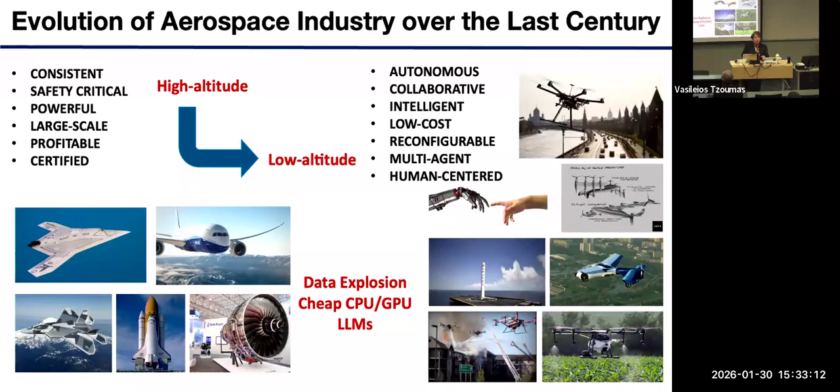From the perspective of the aerospace industry, what we see happening is a shift from the high altitude to the low altitude space. In high altitude commercial aviation, by enforcing zero tolerance to accidents, public trust has been achieved, with 4.5 billion passengers flying airplanes per year.

For low altitude space, we don't have such powerful claims. The low altitude space remains highly vulnerable to different uncertainties, with the DCA airport collision of a year ago being a classical example, when a military training flight collided with a piloted passenger jet. This means that at low altitude, we have lots of problems to solve.

A few years ago, I was at Georgia Tech for a seminar visit like this, on a cold January in 2018, when one of their professors, Evangelos Theodorou, who was a finalist for the Alpha Pilot competition created by Lockheed Martin and MIT to challenge drone racing environments, asked me if we could bring the L1 adaptive controller into this environment, because he was trying to compete.

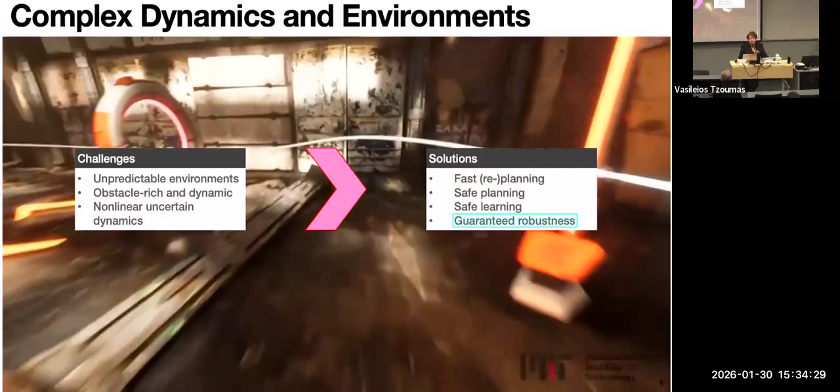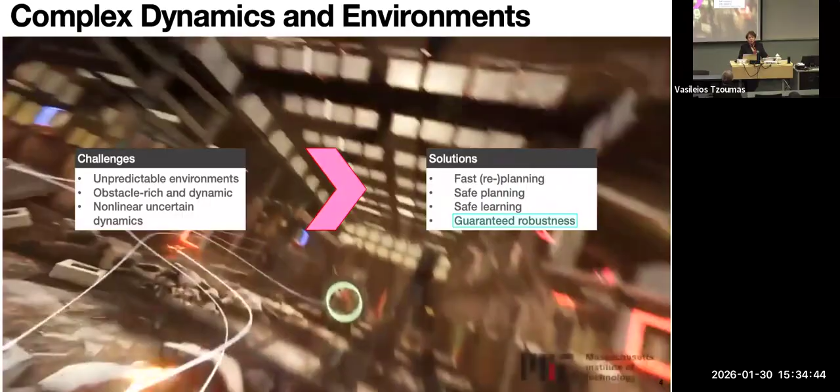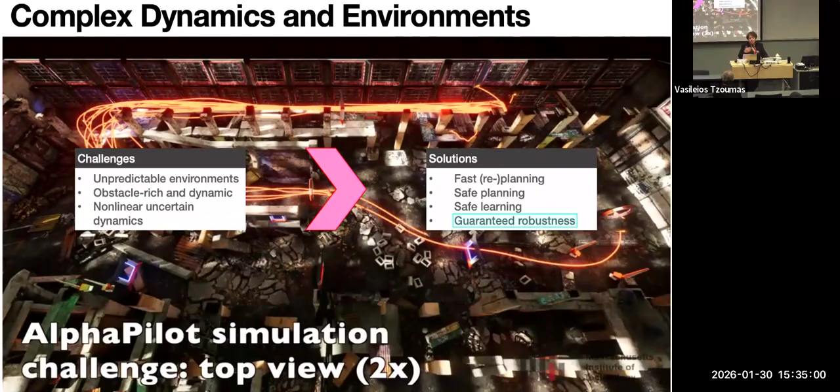So we have vision-based sensors mapping the environment every millisecond, creating and updating the new path. We need a type of control algorithm suitable to work with these environments.

So let's move forward and see what it means to have an autonomy pipeline. The autonomy pipeline has these types of sensors, mostly vision-based, mapping the environment and helping the planner generate a trajectory, which the autopilot has to follow.

So in this process, there are fundamental questions coming up. What if the autopilot cannot deliver what the planner is asking to do? And what if the planner does not account for the errors in the environmental map? The autopilot needs to have awareness of its limits and be able to communicate it to the planner to generate trajectories that it can safely fly along.

The number one question we face in this communication is the language barrier. These vision-based sensors processing visual information, like self-driving cars with autopilots in Tesla cars, face pedestrians or traffic of the daily commute that cannot be modeled deterministically. The right representation of these is stochastic models. Naturally, these vision-based sensors that map the environment give inputs that have stochastic origin.

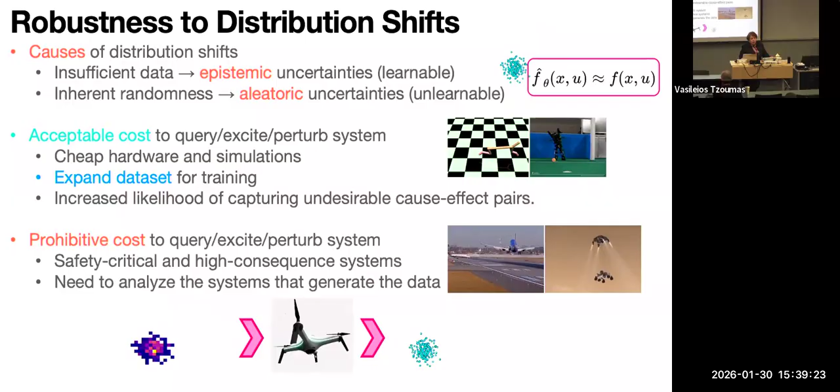This is where we need architectures that would guarantee safety and predictability in application and enable safe use of learning algorithms. These architectures that we aim to establish must be able to use distributionally defined guarantees in a rigorous way, and they must be independently verified by some Monte Carlo methods to help merge the design space with the test space.

And the reason I say this is because, for example, the way the FAA certifies flight controllers is that they get these gain and phase margins across the flight envelope through gain scheduling, concatenation of linear baseline controllers, and they test it all in a Monte Carlo environment with some uncertainty distributions. And if it all checks green, it's good to be certified.

But it would be good to have theoretical guarantees, to know how to get distributional robustness guarantees for deterministic controllers and to merge the design space with the test space. And we want safety to be decoupled from learning, because quite often you cannot afford the luxury of large data sets.

You may have poor training, or data disappearing from your imaging sensors due to occlusions or other kinds of disturbances. So you want to have safety guaranteed independent of the learning, and the learning to give you the opportunity for improving the performance intermittently.

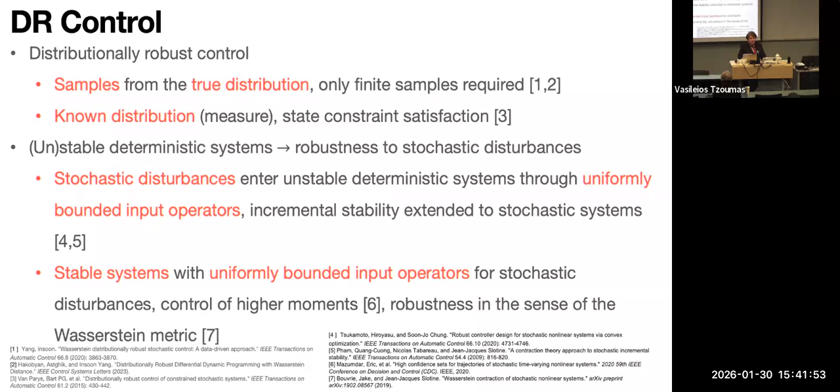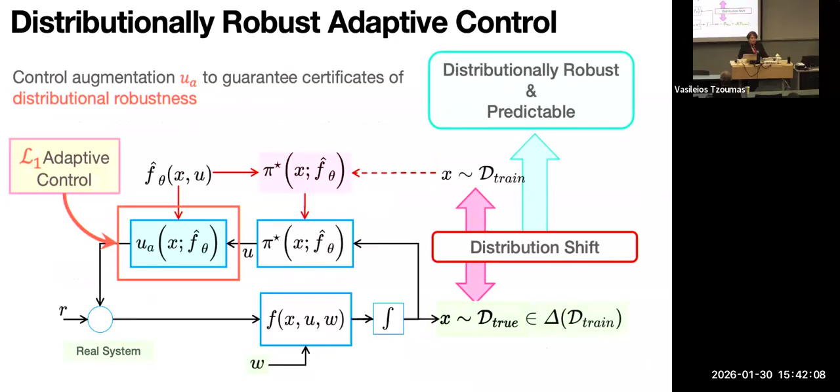That's our difference. So what we do: say you have a machine learned controller, denoted here by pi star. When you deploy it on a real system, you will face distribution shift. This is where we bring in the L1 adaptive controller to robustify and maintain it within a tube around the nominal distribution.

L1 adaptive control is not new. I have presented it here in Michigan twice already over the past 20 years. It was established by our group back in 2005-06. It's a simple filtering mechanism to decouple the estimation loop from the control loop to enable fast estimation rates without losing robustness. Its input-output performance is equivalent to internal model controllers, with the only difference being that here we do not have model inversion, while in internal model control you may have model inversion.

Through this predictor structure, which is a straight feed-forward dynamics, we are able to accommodate saturations, delays, and other types of nuisances from the system as we learn them on the go, avoiding model inversion. So it has been commercialized, it has been published, and the performance bounds can be represented through the decoupling structure.

One of the terms is inversely proportional to the rate of adaptation. The other is proportional to the filter bandwidth. This decoupling helps us tune it differently: one is based on the CPU, the estimation bound, and the other is based on control channel bandwidth. The proofs are done through Lyapunov and small gain theory, well-established tools historically.

Here is a brief history of it. As I said, we started in 2005-06. We flew it on the NASA subscale Boeing 757 in 2007-10. Then we got lots of papers with different companies. Raymarine commercialized it for evolution autopilots. Caterpillar commercialized it for hydraulic pumps. We got on the experimental rig of Statoil before the oil prices crashed, for drilling pressure regulation applications. We worked with Eurocopter, Seagate, and lots of other companies.

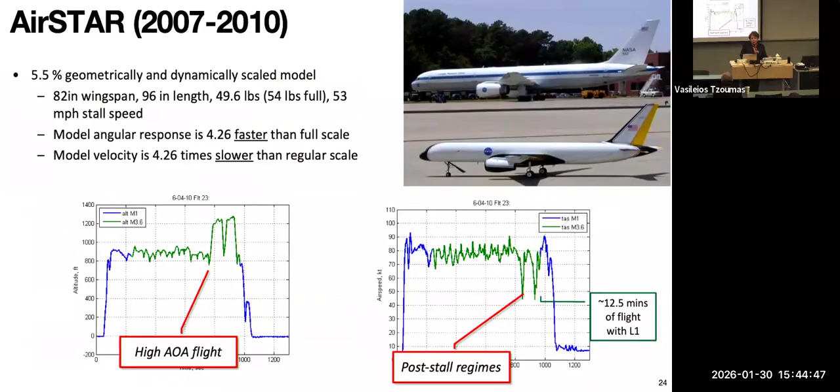So I want to do a brief recap of this Boeing 757 flight test from NASA. This is a 5.5% model that NASA built over five years. 24 groups were funded to fly the controller. Everyone was given one flight condition: 4-degree angle of attack, 80 knot airspeed flight condition, and we had to test controllers for robustness.

This is the stall indicator here. You will see they will push to stall, it will turn red, and they will repeat it. Try ramping up to 15, okay? Moment around 18, okay? Well, back to normal flight. You ready? Yeah, okay. All right, turn down. Okay. Fuel state is 4.7.

Let's repeat that. Climb, maintain 1,200. And they repeat it to check the transients, because our big claim was the transient performance guarantees. Repeat that. Slow down a little bit.

Go. Okay, let's stop research. Recover, they ran out of gas. This is the red indicator.

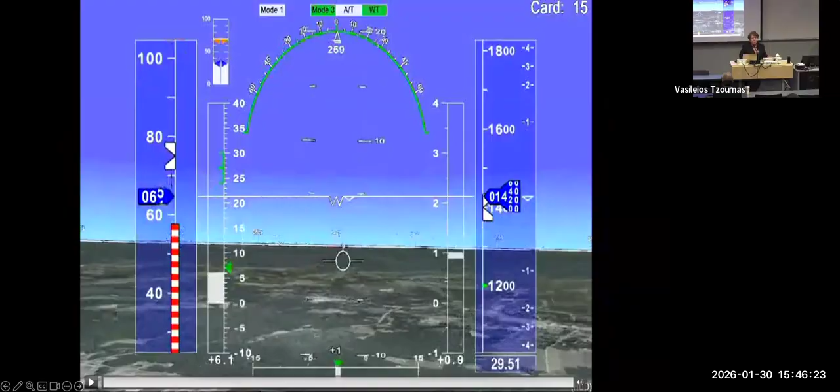The reason they repeat is because they wanted to test for the transients, which was our biggest claim. Out of 24 groups, 9 groups were invited for flight testing. The rest were disqualified at the simulation level. They eventually used the controller to go to the edge of the flight envelope, to 28 degrees, to do Schroeder sweeps to collect more data for updating the aerodynamic models. This is what you see. The plane was stalling at 12-15, as you saw. Now they went to 28 and are doing the Schroeder sweeps for updating the aerodynamic models.

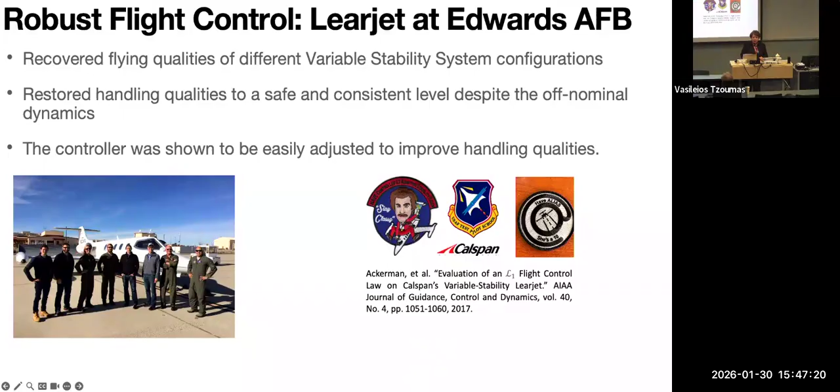With that, we reached 2015, when one of my former students called me from test pilot school at Edwards Air Force Base, suggesting I test it on a Learjet model called Calspan, which is a variable stability system, so it can shut down if something goes unsafe. Here, they didn't have the opportunity to go into stall; the vehicle wasn't suitable for that. But they could do, for example, landing, which NASA couldn't do on the 5.5% model since they had a safety pilot for landing there. But here they could go into landing. Let's look at their flight test.

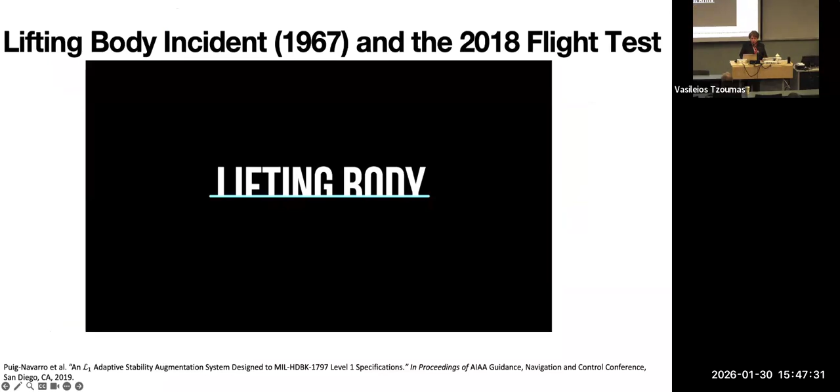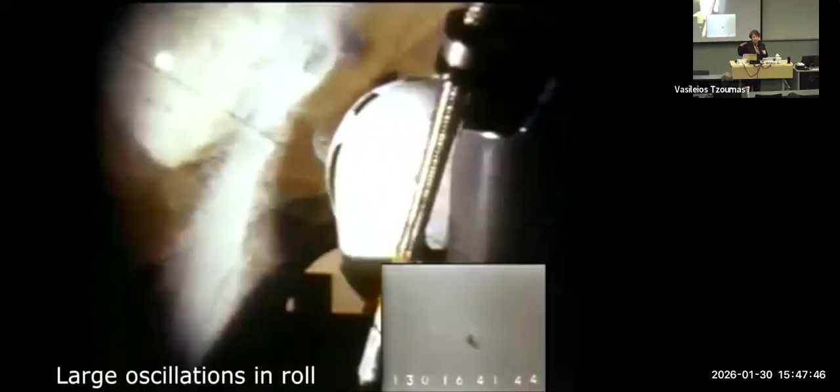There was some media here, Aviation Week, who liked to write about the test pilot school flight test. This was the F-16, which we cannot show. But this is the flight test where they had accident data from 1967. They could load this onto the test aircraft, the Learjet, to make it behave like this accident, where the aircraft is released and gets into roll oscillations and eventually crashes. The pilot luckily survived in this case. This data could be loaded on the test aircraft to test pilot performance. The pilots get licensed by flying this airplane. The first episode is very short because it behaves very unstable and shuts down, but you'll see my student sitting on the left.

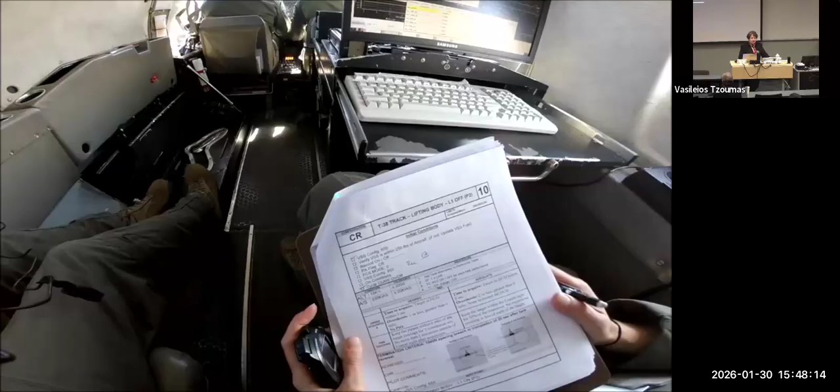Students love to go and test their controllers. Can you get the airplane? You get the airplane?

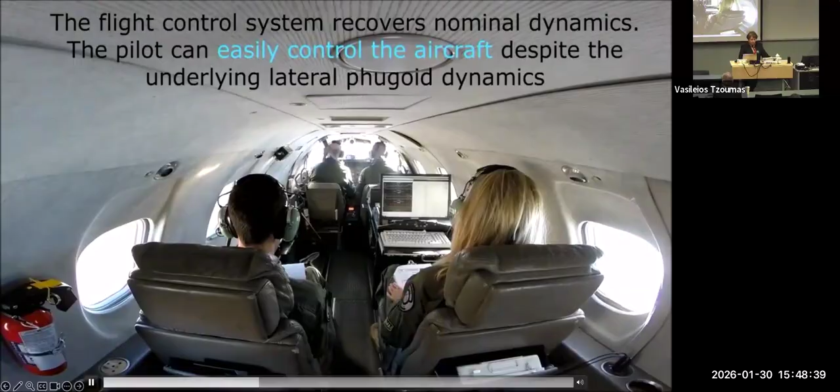You heard the pilot saying there is still something there. I will explain it with stochastic analysis. The deterministic analysis never gave the answer for this something. That's a small buzz, and now you will hear them.

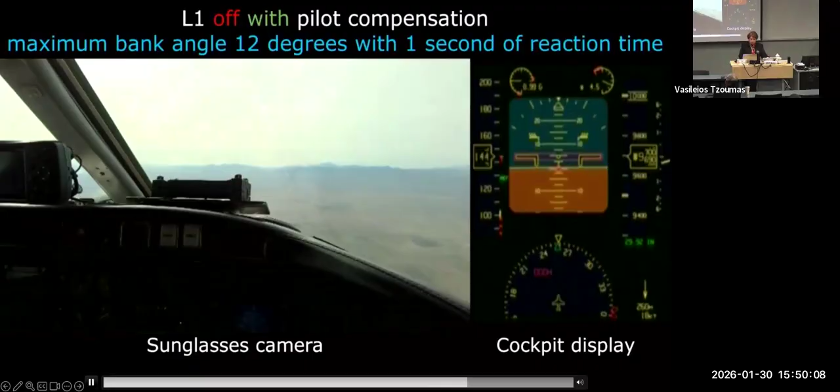On, in ready, tackle. Running. Engine on. Okay, power's coming back. My hands are free, 3, 2, 1. Now. Controls fixed, and recover please. Okay, and recovering. Power's back. And now the pilot corrects it up to 12 degrees. You see the bank, I'm ready to try this now with the pilot correcting for it. Okay, I'll give it about 1 second reaction time. I'm on conditions, all right, and then recording on my call. Ready, tack, on. Okay, power will be left throttle. Okay, in 3, 2, 1. Now, one potato and recovery. And recording off, matching throttles.

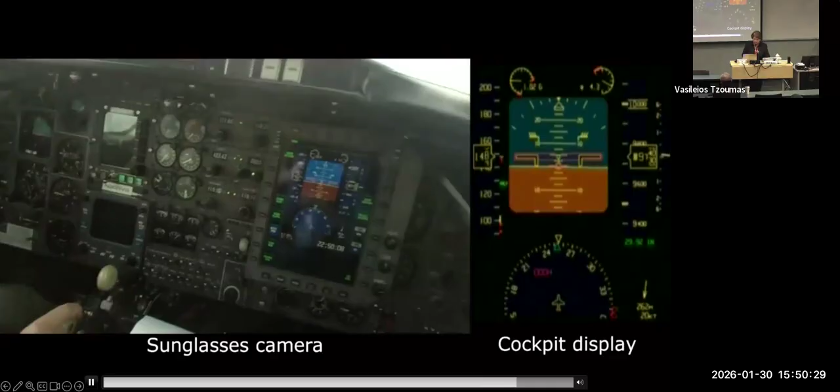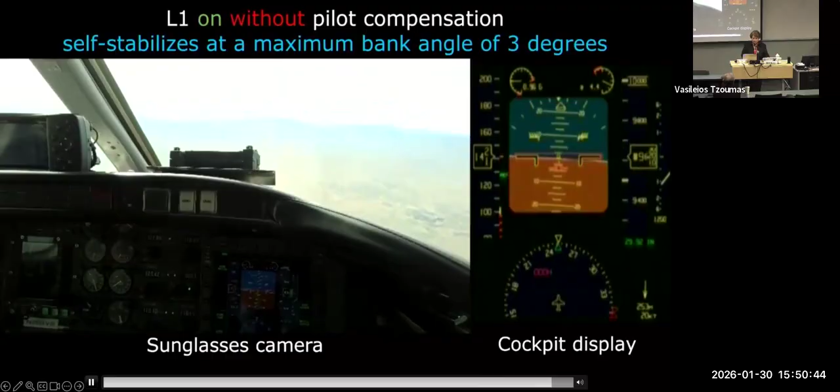So the pilot was able to get to 12, from 20 to 12. Now with L1, they get to 3. And I'm ready for the recording on. Ready, on. Okay, left throttle coming back in 3, 2, 1. Now, I'm not touching the controls. Nice demonstration, check that out. About 3 degrees of left bank. Feeding in the rudder to match. I can feel that. It's descending a bit, but that would be easy to compensate for. Okay, I think you got some good data there. All right, recording up, matching power, recording's coming off. So 3 degrees, something left, right? So the deterministic analysis does not give these answers.

But when we went to stochastic, we found the answer. Right here also the Aerospace and Defense Technology wrote about us - I wasn't aware of it. In the other case, Aviation Week came to test pilot school interviewing us, but this one I got from the college. Interestingly, we were on the front page.

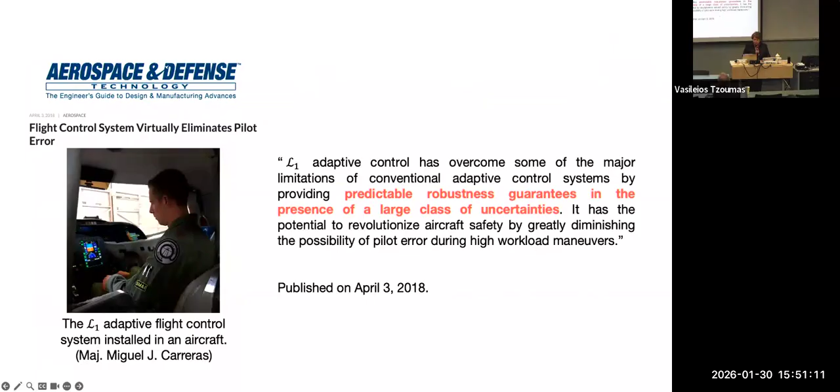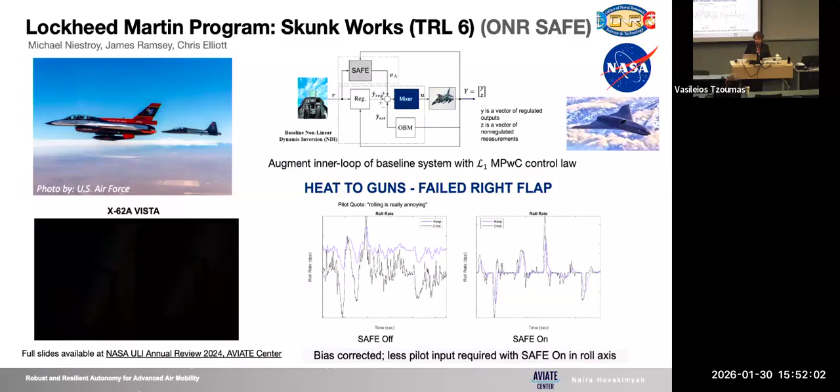So it now goes through future transition, technology transition opportunities at Lockheed Martin. We look forward to more opportunities to work with them. They claim TRL 6, and with the future platform they're hoping to get TRL 8, 9. It has to do with the size of the platform, this TRL grows. Some other applications along the way.

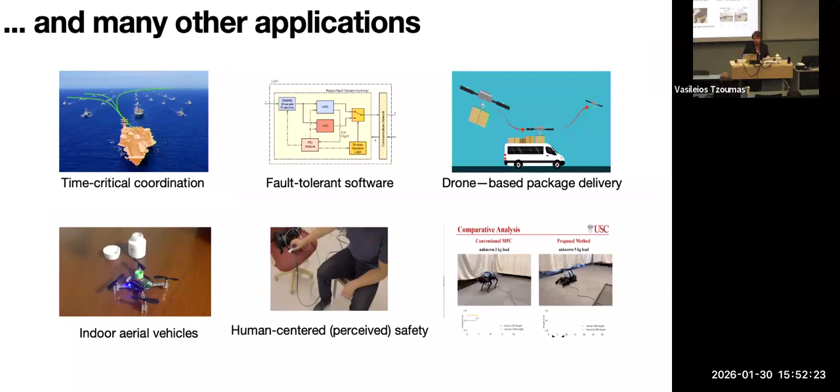I like to show this one because this was something that got us into the New York Times, that's why it's worth sharing. It's an elderly care project.

This is the inspiration. This helps tell why control is important to people outside control. You show these cartoons, everyone understands this is a control challenge. Now they can't lift it, they call friends.

And they call friends, and communication, cooperation, collaboration, and then human safety perception. So this vision motivated us to work with a psychology professor who was using VR to test humans' perception of safety, which is different from engineering safety. Engineering safety is about lack of collision. Human safety perception is a lot different - why can't I move? Oh, okay.

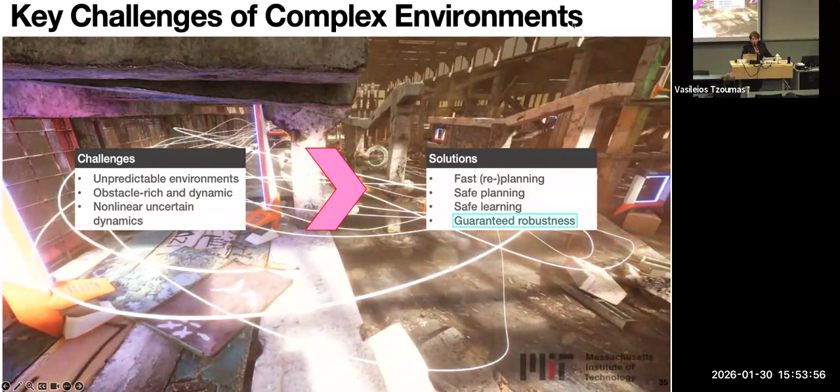So we come now to this environment. And in this environment, like we said, you have to bring drones to find humans, to save humans, and we have to be able to work with autonomy. This was brought to me in 2018 at Georgia Tech, and it immediately opened up this.

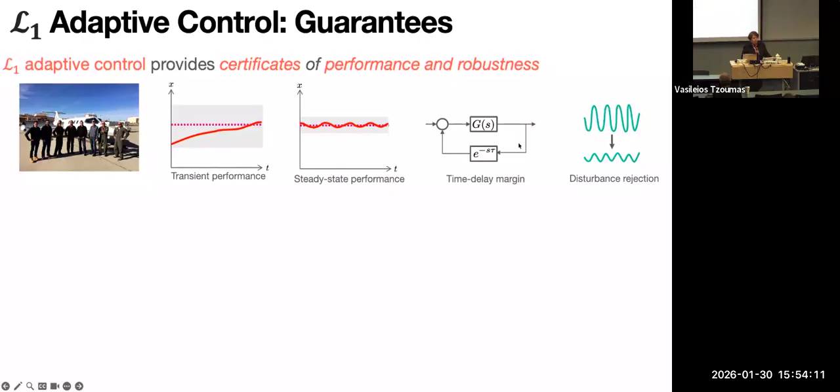So if we designed L1 with this historical understanding of robustness, transient, steady state - what we teach in junior level control class - and we address these issues rigorously, and we flew the Learjet. As the world around us changes, new forms of guarantees are needed.

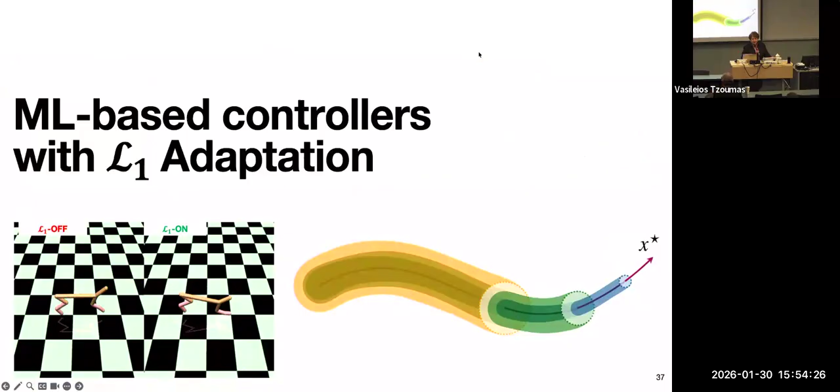So now our sensors are data-driven. We have to talk of distributional guarantees and all these things. So the Georgia Tech colleague was one of the finalists, and he was implementing the model predictive path integral controller on the drones. This is 2020 IROS.

This was the year COVID hit. I have to give lots of credit to the Georgia Tech students who were going to lab with masks, as interns. There was no more than one person allowed to go do experiments to integrate the L1 adaptive controller with the model predictive path integral controller.

So the model predictive path integral controller is an MPC solution with learning. It computes optimal control solutions forward in time, updates the control sequence iteratively by sampling thousands of trajectories. This is what we don't like. L1 robustifies their solutions against discrepancies. It can leverage parallel sampling for modern GPUs, and handle complex dynamics and cost functions.

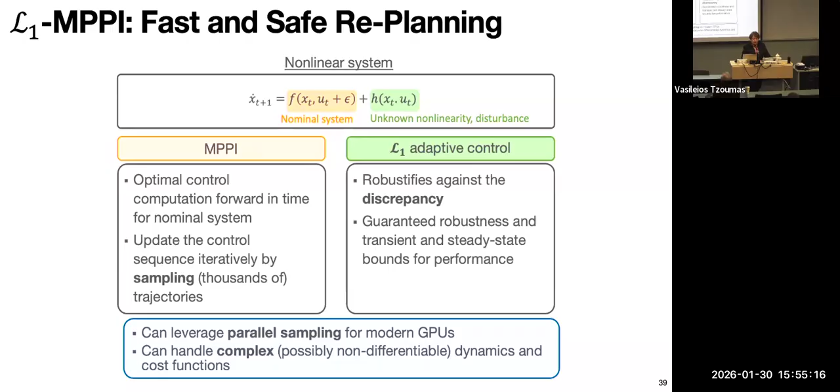So they got this IROS paper. This was empirical demonstration that we could bring L1 and integrate it with MPPI to clear some of the gates where they were crashing. They were not the winners.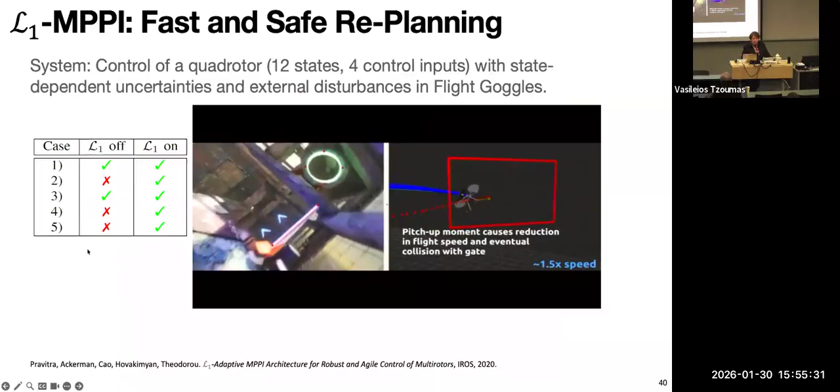The winner was Scaramuzza's team, but they were one of the finalists, and they had data, they had experience, and we could test it already after their competition was over. And as you see, we went and cleared all these gates, showing empirical evidence and getting out an IROS paper.

After IROS, we did this MBRL paper. We did some empirical trials. So we augmented a model-based reinforcement learning controller with L1. The challenge is that reinforcement learning algorithms learn models that are highly nonlinear, and the parameters of these models never match the true parameters of the system because they take some neural networks and train.

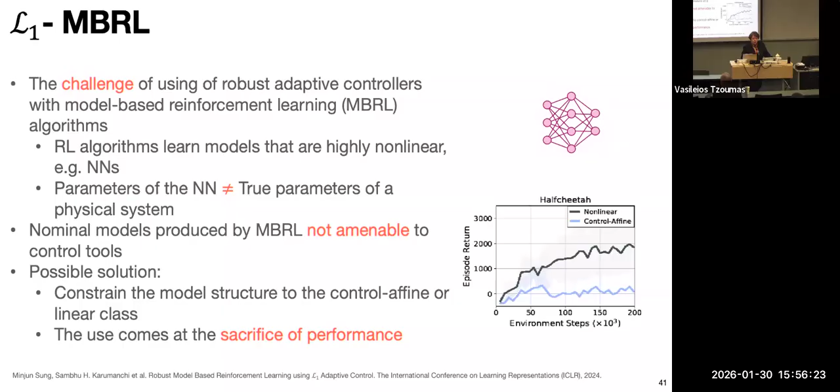So they are not really ready for classical control type of augmentation. If you want to do it, you have to linearize the model structure, but it comes at the price of sacrificing performance. So we wanted to do an add-on L1 to improve MBRL performance - don't touch the legacy architecture, don't touch the assumptions, take that high-level MBRL like a black box and see how you can augment it with L1.

It was lots of effort - 2 years we were submitting it to some machine learning conferences. Eventually we got it into ICLR in 2024. And we tried it on 5 different models of the Mujoco environment: inverted pendulum, swimmer, hopper, walker, and half cheetah. And we got improvement almost in all the cases except for one.

Because now we have probabilistic guarantees, maybe we didn't tune enough, because we wanted a single L1 controller to work across all the environments, all the systems, without any redesign or retuning - which is our main claim with the L1 adaptive controller, that it's easy to design and it doesn't need retuning or redesign.

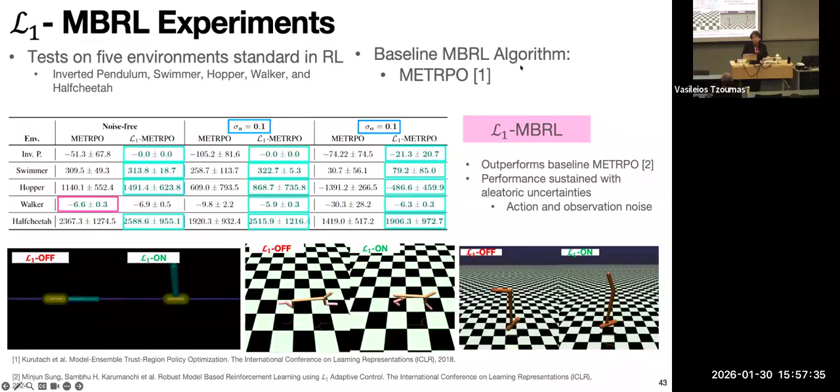So in one case we didn't see the improvement, but now we're augmenting an MBRL controller. Things are stochastic, guarantees are probabilistic. So this motivated us to look into this distributionally robust adaptive controller more rigorously.

In a recent SciTech conference, we showed augmentation of imitation learning. Where do you need imitation learning? So you have a pilot who learns to fly on a simulator, then goes to fly the real system. Here you have uncertainties between the real system and the simulator, which the L1 adaptive controller can compensate for.

But if you want to take out the pilot and put an AI agent, then maybe using L1 and justifying it is not honest enough. So you want to have some imitation learning that can imitate the pilot. You can collect pilot data and imitate the pilot.

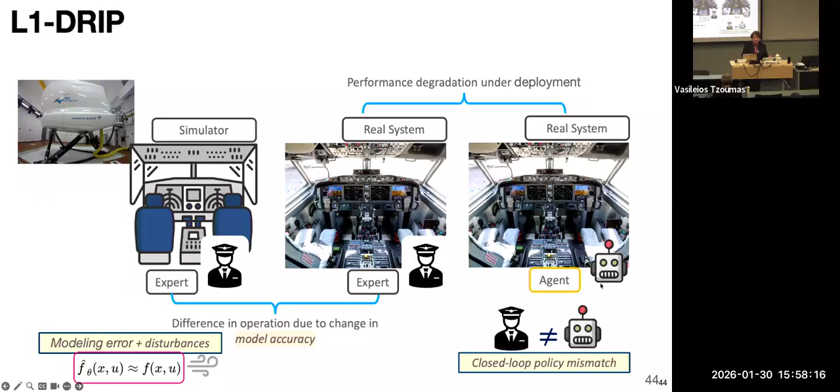So it's the right use of maybe imitation learning policy in this context. But then you want to combine these different robustness characteristics coming from L1 for modeling uncertainty, and from imitation learning for policy changes, because imitation learning at that point assumes there is no change in the dynamics. It just replaces the pilot, assuming the dynamics doesn't change, but in reality it changes. So with a layered architecture, you can compensate for both.

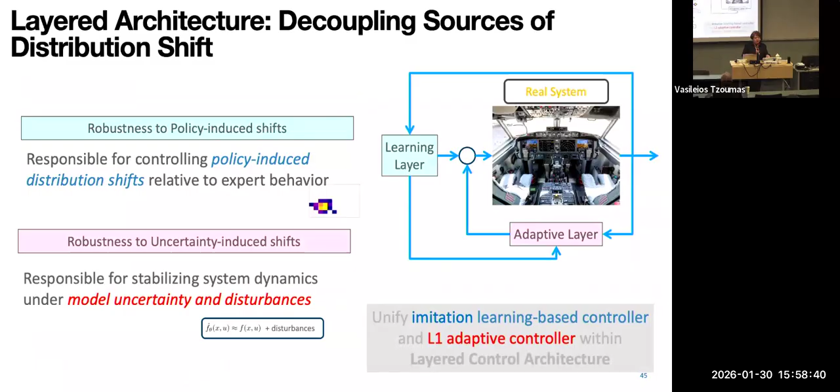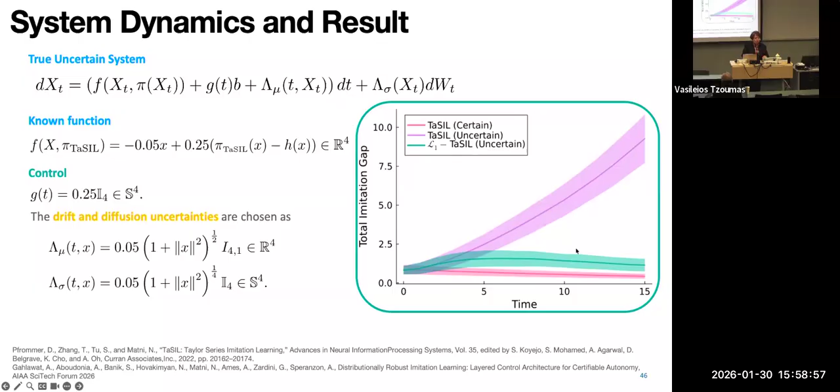This decomposition is critically important. And here we show some simulation. This is a toy problem. The NASA model is still being worked out with its full simulator environment. But with the toy problem, we just showed how bringing L1 on top of imitation learning can compensate for some of the uncertainties that the imitation learning could not.

Now let's do a little bit of math. We're half hour through the time, so this will be minimal. So let's put some rigor into all this, right? We're talking so much about certification.

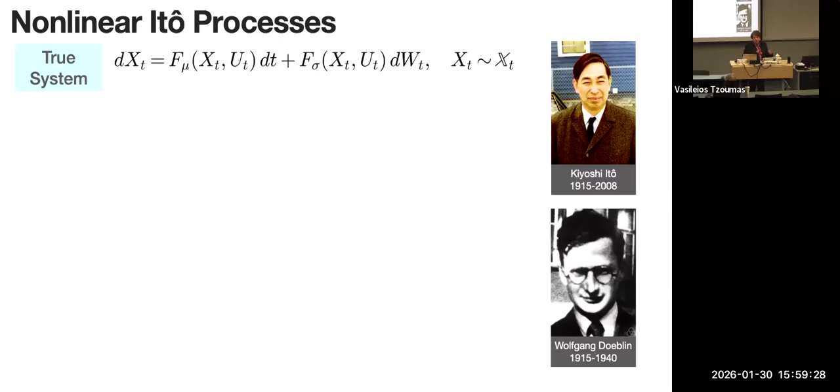So what do we say? We have a deterministic controller designed for Euler-Lagrange equations, which are deterministic. But I go and implement it on the real-world system. The real-world system appears to be highly uncertain, highly stochastic. So we look into nonlinear Ito processes with uncertain drift and diffusion terms.

And we understand that these uncertain drift and diffusion terms can both be decomposed into known and unknown components. And we also have aleatoric uncertainty, the Brownian motion that's multiplying the diffusion term.

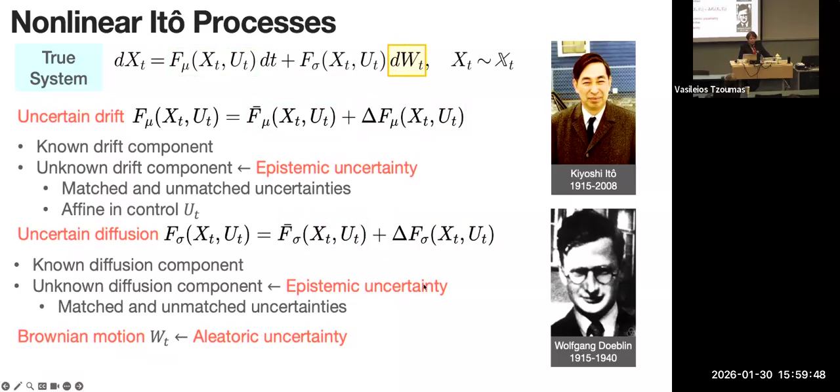With this, I have to set up a known system, right? Because anytime we want to do analysis of a nonlinear unknown system, we need to have some nominal model that we like. We have to set it up in a way against which we do the analysis.

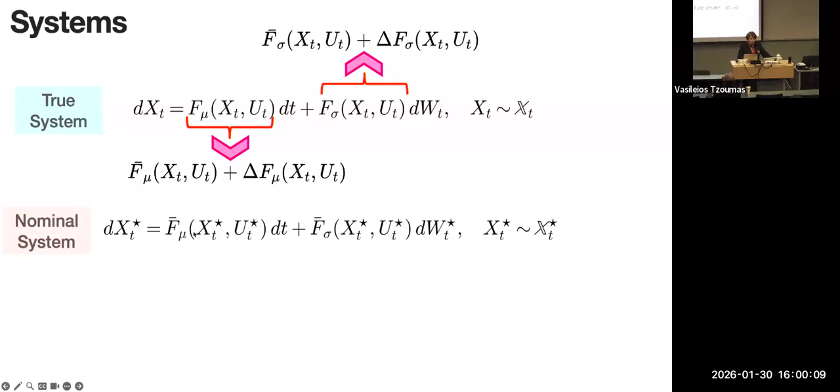So the nominal model takes the known components of drift and diffusion, but it needs to have its own Brownian motion. The key challenge here is to assume that this Brownian motion of the nominal system and the Brownian motion of the true system, the aleatoric uncertainty component, are completely independent. It's very easy to make them dependent and go through proofs in a second.

The challenge is to deal with this assumption when these Brownian motions are uncertain. But this is the honest way of approaching the problem. It took us four years to get over some of these assumptions to make the theory go through.

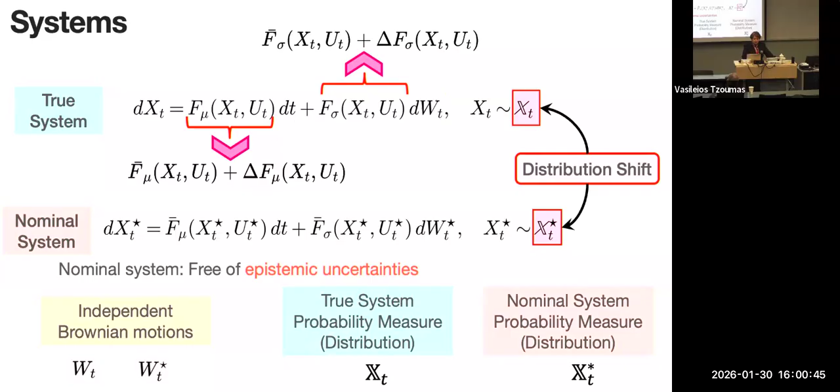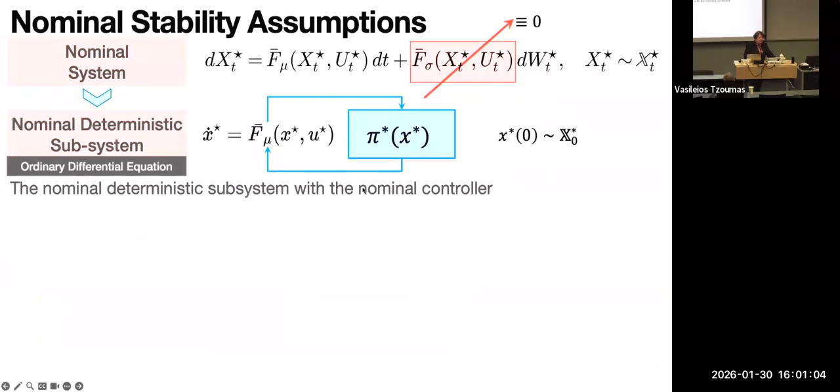So we want to tackle the distribution shift. If I look into the nominal system, I need also some assumptions about the underlying deterministic dynamics. So I get rid of this diffusion term by setting up this Brownian motion and getting rid of it, to be left with a nonlinear deterministic subsystem for which I can design, say, some type of control policy, pi star.

I need some type of assumptions here, and these are standard assumptions: incremental exponential stability of the origin. The analysis of it can be done through incremental Lyapunov functions, matrix measures, Finsler-Lyapunov functions, and Riemannian metric conditions.

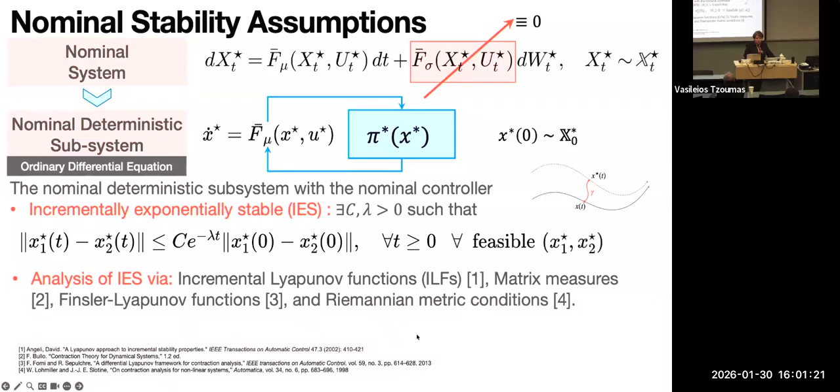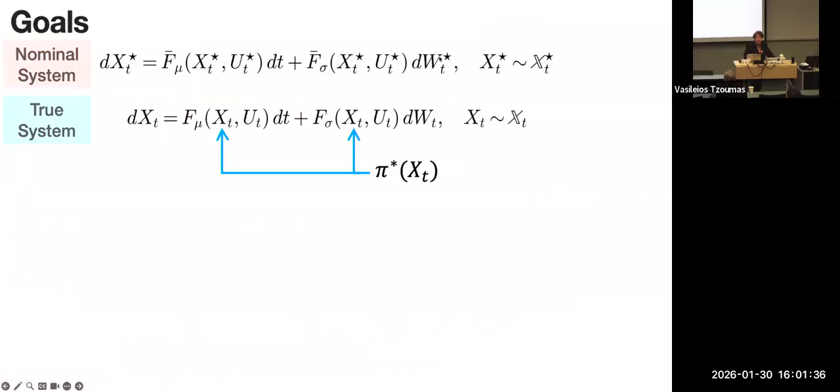Nothing new here. And now moving forward, I have the nominal system with some policy, which was this, but now I look into the nominal system that I need for the analysis. This was the deterministic part. Now I have the true honest nominal system, and I have the true system.

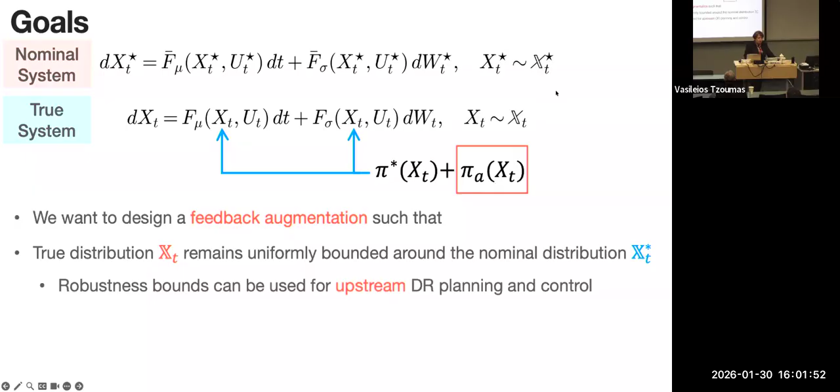When I put pi star into the true system, I augment it with some adaptive increment, with the objective to keep the true distribution bounded around the nominal distribution. The bound we compute in the Wasserstein metric, which we borrow from optimal transport theory. It preserves the distance and shape. It's a metric on the space of distributions.

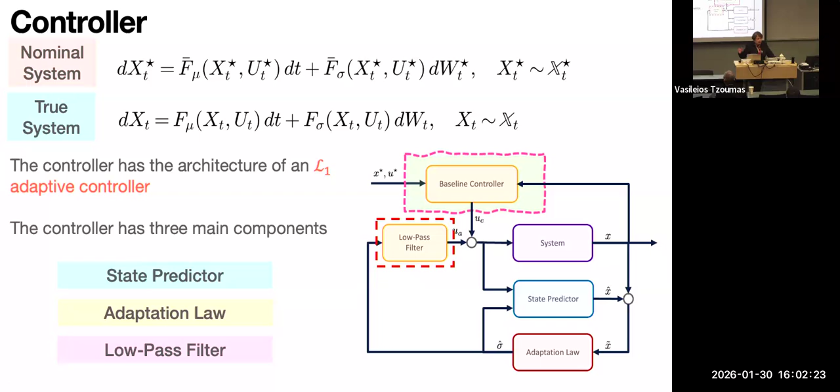To achieve that, we are applying the L1 adaptive controller for augmentation, which is born in the deterministic world. But now as I apply it, I have to acknowledge that it gets the state measured by a sensor, which will be stochastic in nature. So it brings colored noise into the system. I'm bringing this deterministic controller that gets state measurement from a stochastic sensor. So how do we deal with this? It results in colored noise injection through aleatoric uncertainty, Brownian motion that gets in.

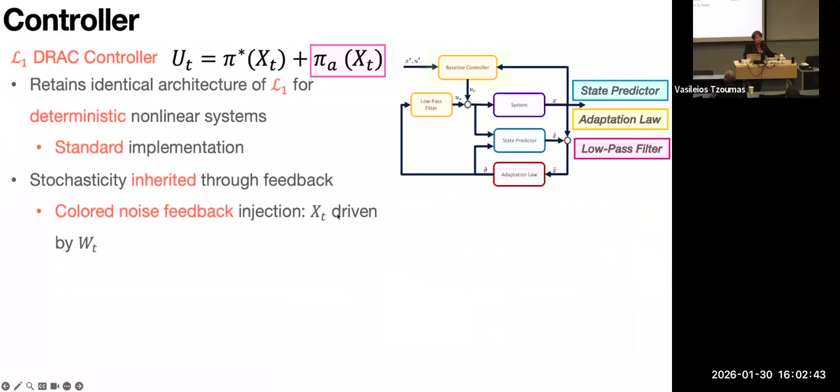Our implementation remains in the feedback space. Our guarantees are given in the space of distributions. No need to assume an unreasonable distribution of feedback. I'll skip all the math now to make the Friday afternoon easy.

So we get guarantees in terms of the Wasserstein metric on the distributions, and we get pathwise guarantees. These are upper bounded by terms which remain uniformly bounded away from zero. Remember, the pilot was saying there is something left there, and during the engine shutdown they had 3 degrees left, because now we get bounds that remain bounded away from zero. One reason is this independence of the Brownian motions that I emphasized. If I give up on this assumption, in the absence of uncertainties, I can make these bounds go to zero asymptotically. But because of the independence of the Brownian motion and the presence of unmatched uncertainties, these bounds remain bounded away from zero.

The Wasserstein metric will collapse to the Euclidean 2-norm and recover the original performance bounds of the L1 adaptive controller that we had for nonlinear deterministic systems, if I take out all the stochasticities and go back to deterministic.

So when I look into my pathwise bounds, there are nice terms to observe. We get this polylog bound, which otherwise in the distributionally robust control literature, they don't have the log term. In general the bound comes across like this. Yongxin Chen has this polylog bound from Georgia Tech, but he's not looking into uncertain stochastic systems, only known ones, so we borrow a lot of his analysis to get this polylog bound.

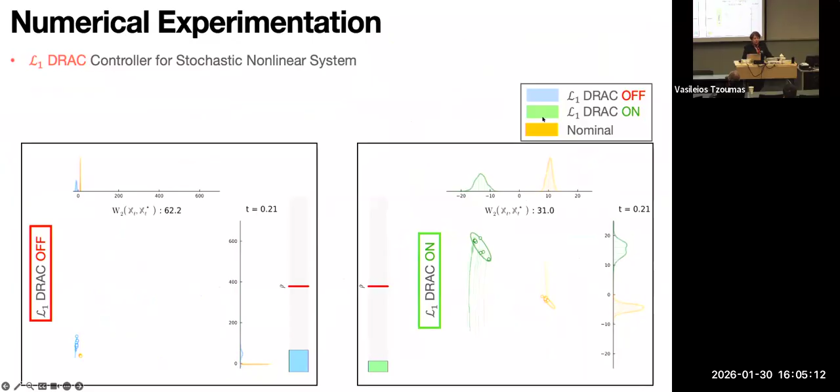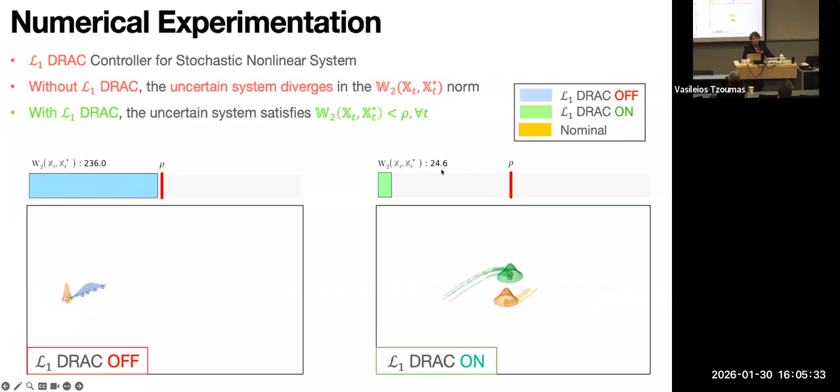Getting back to this autonomy pipeline where we started, revisiting the questions: what should the components communicate, and what should be the language for the communication? So we use these distributional Wasserstein bounds for setting up the optimal stochastic optimization for the planner. The language is the space of distributions, bounded in the space of distributions.

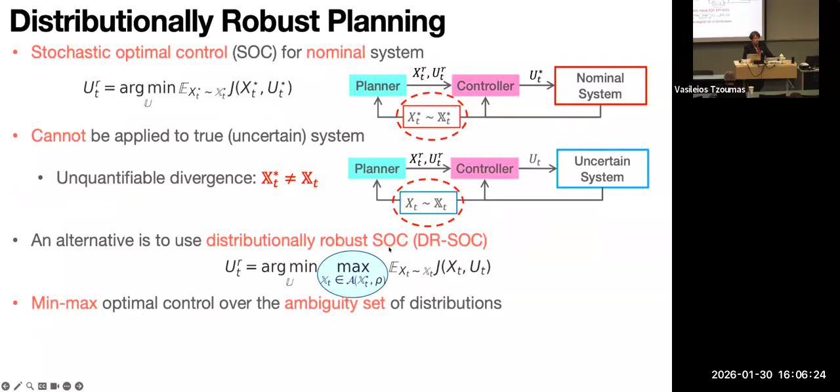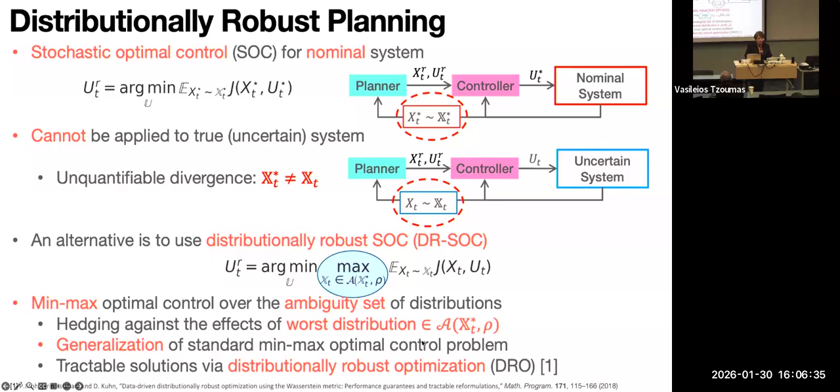The first planner we did is this covariance steering, which I presented at CDC. The stochastic optimization typically used for producing a motion planner is formulated like this, which cannot be applied to an uncertain system. To apply it to an uncertain system, there's this distributionally robust stochastic planner that maximizes against an ambiguity set of distributions, which hedges against the effects of worst distributions. So what we do is take this bound from L1 and pass it to the stochastic planner. The planner requires this ambiguity set, and that set comes from the L1 adaptive controller to maximize it.

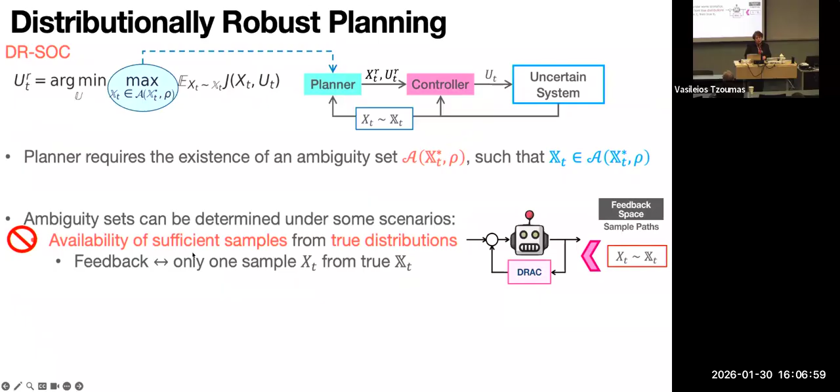So what are the key assumptions here that we were able to relax? Ambiguity sets can be determined under some scenarios. In the literature, people assume availability of sufficient samples from true distributions, which is in some sense idealistic. It may be true, but it's non-verifiable.

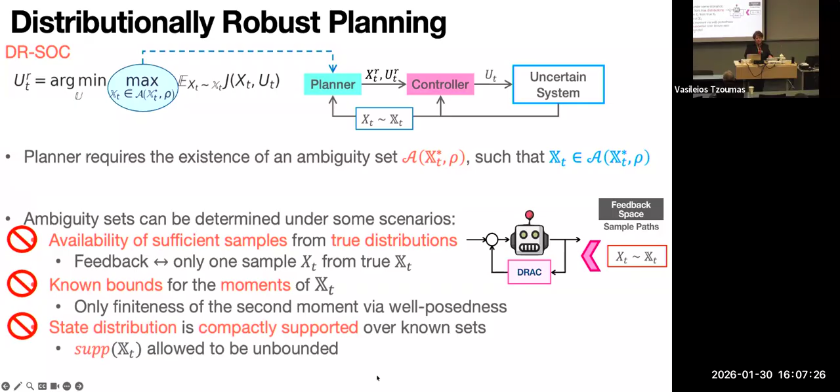So we use only feedback, one single sample at the point of measurement, as I said, it's a deterministic controller. The literature assumes known bounds for the moments of x_t. We only assume finiteness of the second moment by well-posedness, and we do not need to assume that the state distribution is compactly supported. It can be unbounded. So there are some fundamental assumptions that we have relaxed.

And with that, we solve this distributionally robust stochastic optimal planner problem. We get guaranteed margins on state distributions that enable high probability constraint satisfaction.

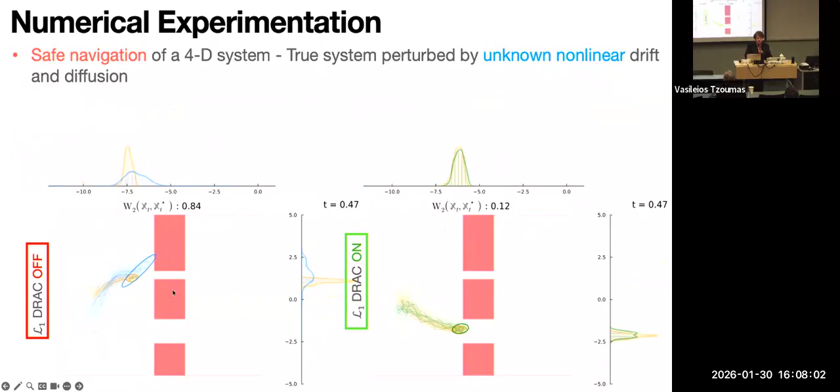By applying this L1 approach, here are the plots we will show. We have safe navigation of a four-dimensional system perturbed by unknown nonlinear drift and diffusion. Without L1, when it goes through this narrow passage, it collides with the obstacles in the presence of uncertainties, which you see in blue. Here it goes through this wide opening. When it goes through the wide opening, it's because L1 helps find this bound.

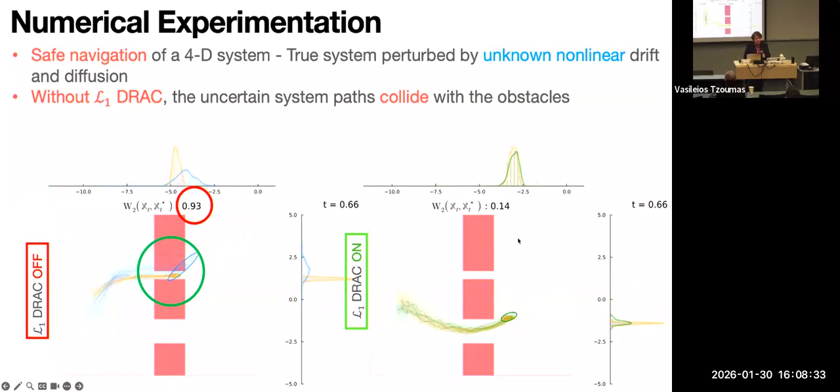And this is still pretty conservative. If we add on top of it some machine learning, maybe it can go also through here safely. But so far, no machine learning has been added. All we have done is matured L1 to be machine learning ready. We showed, on imitation learning, how to augment an imitation learning policy with it. But from the planner perspective, we're just getting there to be machine learning ready.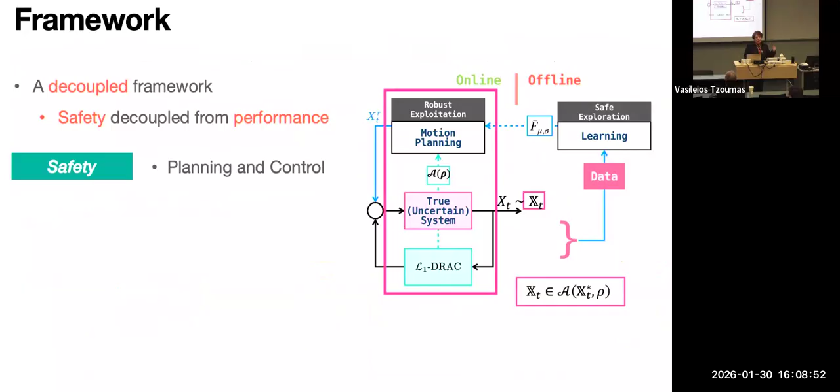Now for some future work, where does it go? It's a decoupled framework, as I said. We want safety to be guaranteed through the architecture, learning to be done offline, and update the bounds whenever the threshold which we specify is available. So safety is guaranteed persistently, performance is improving intermittently. That's how we view it.

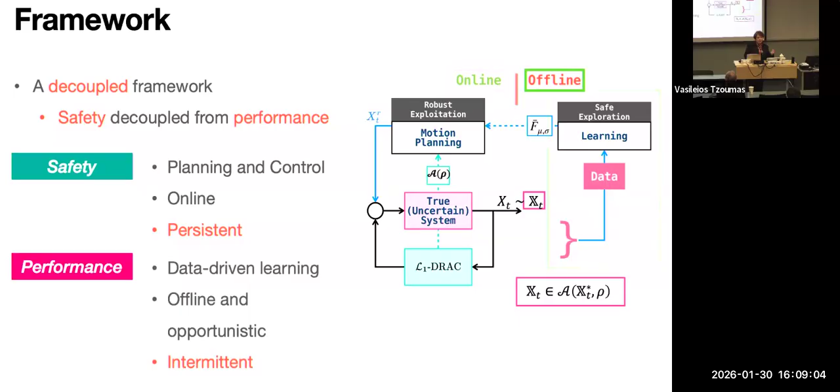Autonomous systems can be designed in different ways, as we know, but this is the way we go. The reason we go this way is because when we take out all the uncertainty, we are back to the deterministic bounds, gain and phase margins. If the nonlinearity goes away, it talks the current Bible of FAA in terms of certification.

Now we have enabled these two frameworks to talk the same language. We had a model risk certificate from machine learning, and we now have certificates of robustness over the set of probability measures for planning and control, and they can talk the same language. So we can pass the bounds to each other and enable certification of autonomous systems by raising abstractions of robustness to a higher level.

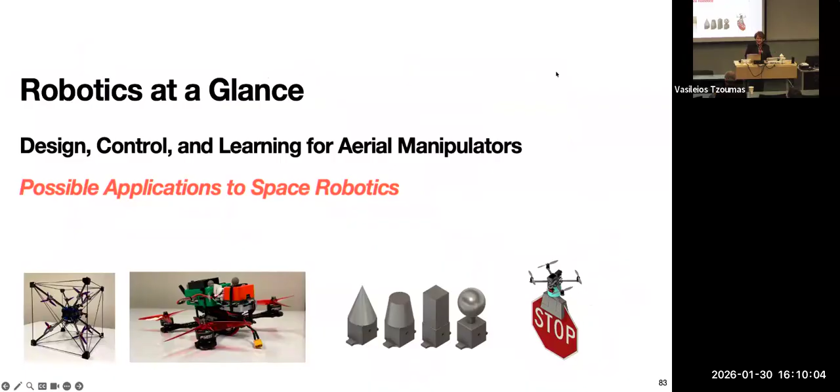With that, since we still have 20 minutes more time, I want to show some robotics applications without going through theory. Today, no matter what you do, if you don't do robotics, you can't be cool. Everything else doesn't matter. So here's an experiment that we're waiting for ICRA submission before it can go on YouTube.

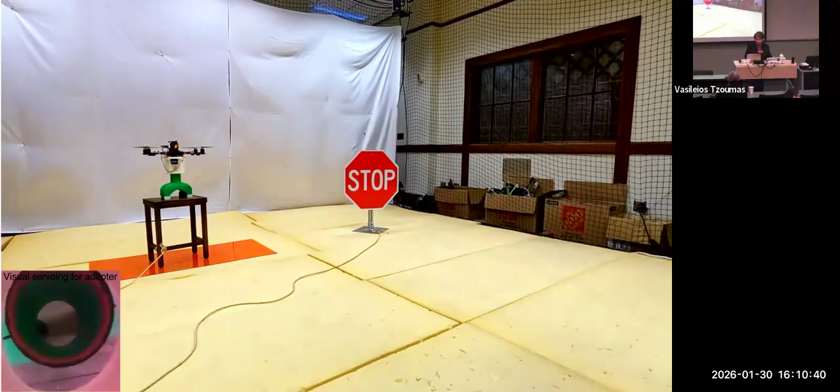It locks now to grab it, to go to the other side.

The same white gripper, it has some softness to it, has done other experiments. So let's run this experiment. It grabs different objects and drops them into these bins. Only here, out of these 20 steel marbles, one will fall out.

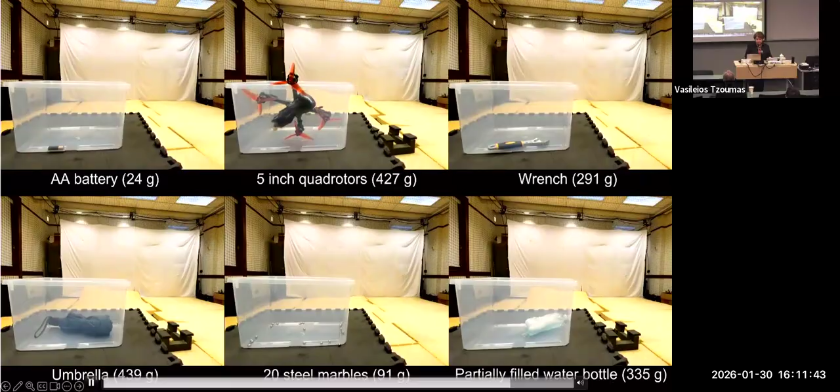Then this is a perching experiment. As you see, there are different perching poles - one is a sphere, one is a rectangle, one is round, one is a little bit trapezoidal. So it perches on all of them.

So quadrotors are not robust to rotor failures, as you know. Here we have a rotor failure experiment. When one rotor fails, it's a multiple model L1 adaptive control. So we have a few different models, and it picks the best one. There is a fast system identification method.

This paper is published in RAL. It can be downloaded, and this movie is available also. So for rotor failure, it's a quadrotor, so it picks up quickly the right controller and implements it. And you see the fan blowing the disturbance, so that's why.

And here is a propeller which is glued, and it will be unglued at an unknown time. We're just showing that. So it's unglued - now it's slow speed. Now it will go to double speed to compensate.

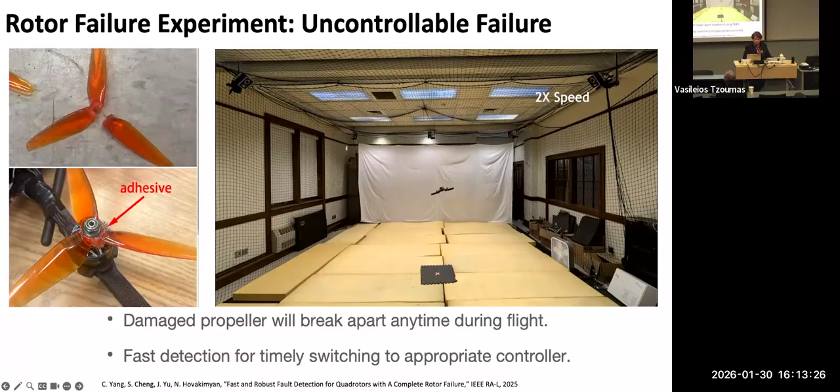So these are further applications of L1. This is a soft propeller, which we did in collaboration with Japanese researchers. It's a collision-compliant propeller that didn't fail from hitting.

This is our Omnidrone platform, which we did in collaboration with ETH Zurich. As you see with L1, we are able to stabilize around the red point. Now you will see.

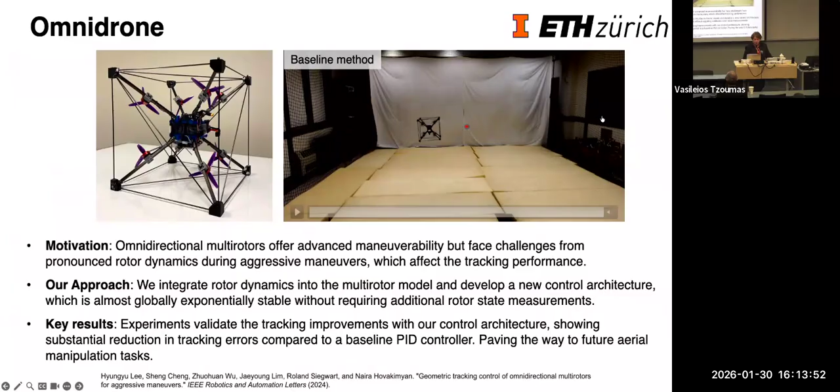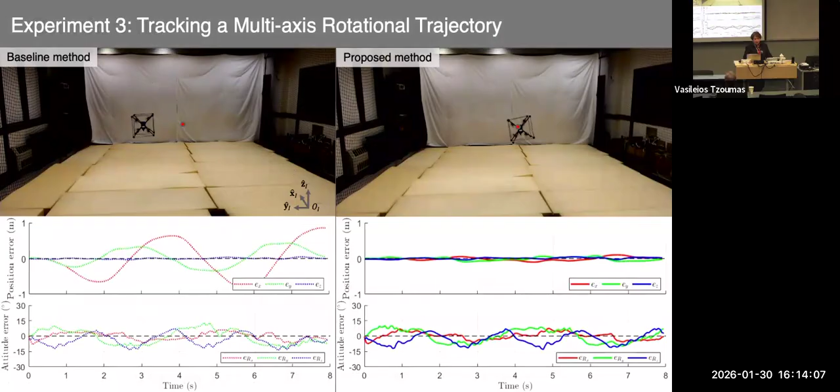So it goes around, but here is where with L1 it remains around. Here it goes around, here it stands at the point, because there is modeling of internal rotor dynamics done here as well.

Here it flies with hand tracking. In this last video, it will clean the emoji. If you see, here it tracks the badminton with hand tracking, and in the last one it will clean the emoji on the whiteboard.

Oh okay, it goes - so it applies force basically. There's a cleaning device, a dedicated sponge on it, so it cleans the emoji. These are things students like to play with.

And something else is coming, so if it cleans the whiteboard, we can go ahead.

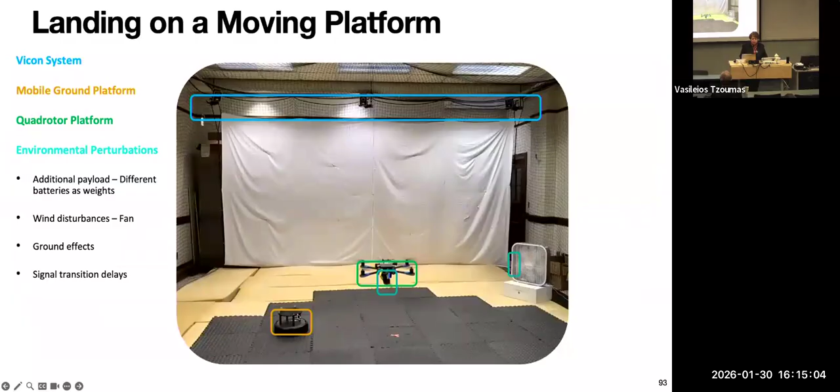This is landing on a moving platform where the moving platform area is very small. It again lands on it.

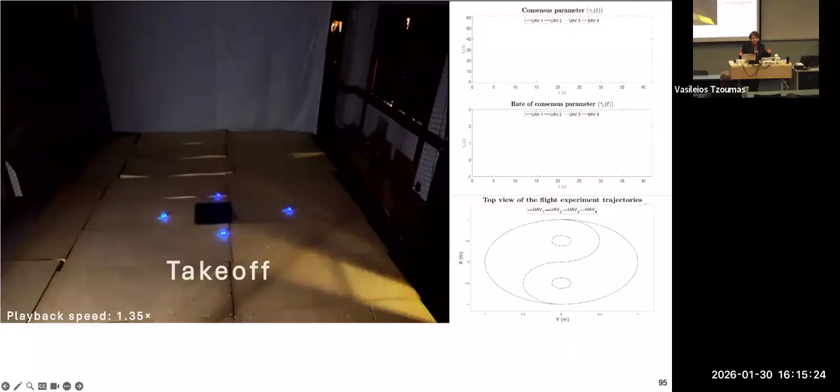So here it lands. There is reinforcement learning augmented with L1, along with lots of other things. This is a multi-vehicle platform involving path planning, collision avoidance, and coordination in time.

Skipping all these details, I'll just show one minute of this movie, and then I will wrap up the presentation.

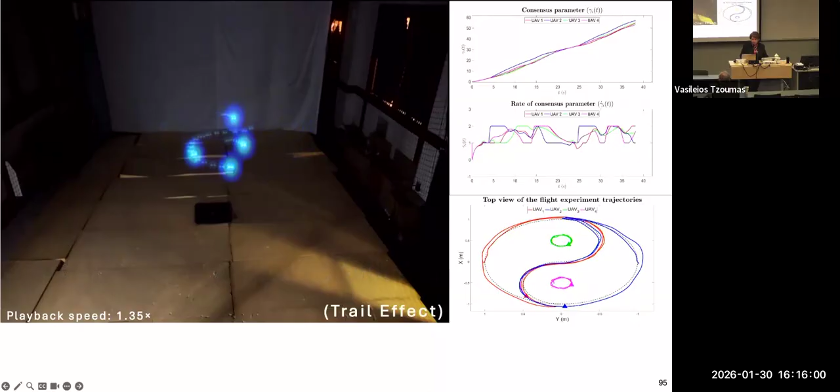Okay, we'll come to that now. The coordination is achieved.

So with this, I'm ready to wrap up. What we got up to now with this distributionally robust adaptive control framework is really global results.

To bring it really to the robotics world and show the real benefits, we still have to do proofs to get the local high probability results. There's lots of work to be done here - maybe another 10 PhD students will work on this topic to make the framework complete.

We can enable fast and safe planning and reachability analysis among uncertain stochastic systems, enabled by these bounds and tight high probability tracking guarantees. We can couple it with state-of-the-art high probability planners for nominal nonlinear stochastic systems, get tight guarantees with numerical tractability of deterministic systems, and do further investigation into sampling-based stochastic optimal control algorithms.

We can enable this framework for sampled-data systems, hybrid systems, as we showed with imitation learning, and we can do other types of machine learning algorithms as well.

So what is the ethos of this research? The ethos is that we develop it in a way so that when you take out all the stochasticity, all the uncertainties, you're back to a deterministic nonlinear system.